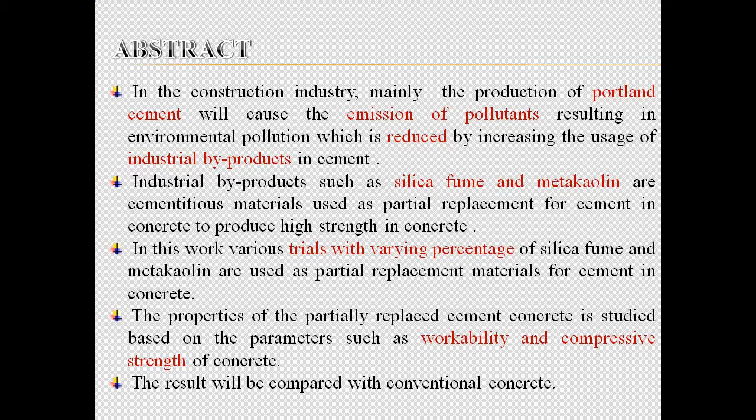So in the construction industry, mainly the production of Portland cement will cause emission of pollutants, resulting in environmental pollution, which is reduced by increasing the usage of industrial byproducts. The industrial byproducts are such as silica fume and metakaolin. Here we carried out various trials using varying percentages of silica fume and metakaolin. We are calculating their strength by seeing their parameters such as workability and compressive strength. The obtained results will be compared with conventional concrete.

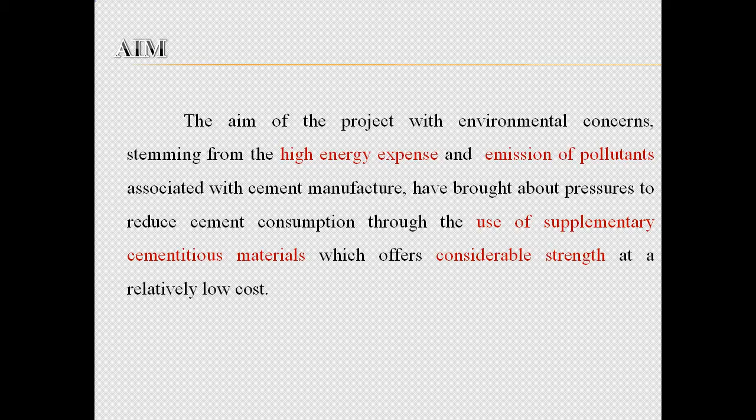The aim of the project: environmental concerns stemming from high energy expense and emission of pollutants associated with cement manufacture have brought about pressures to reduce cement consumption through use of supplementary cementitious material, which offers considerable strength. The objective of the project is to produce high strength concrete using cementitious materials, which are silica fume and metakaolin. By adding these materials, we can get an improvement in workability, durability, and resistance to cracks. It also reduces the emission of pollutants and can increase the lifespan of concrete.

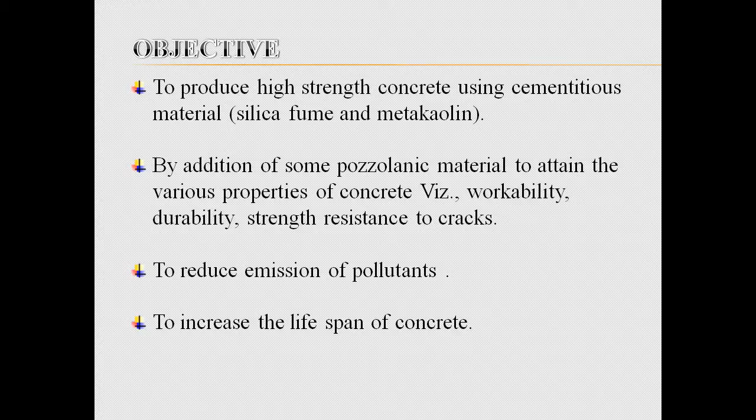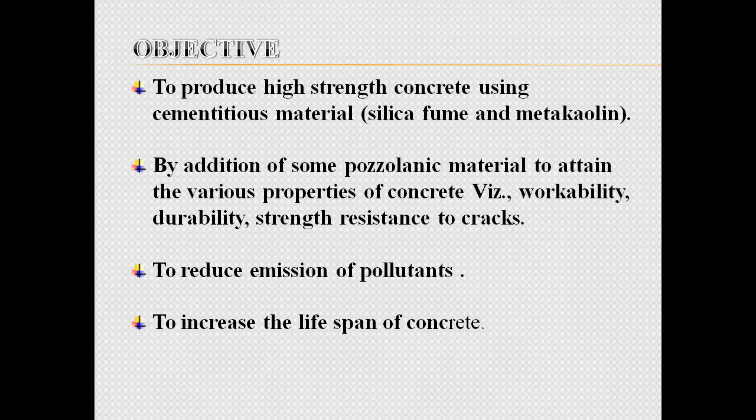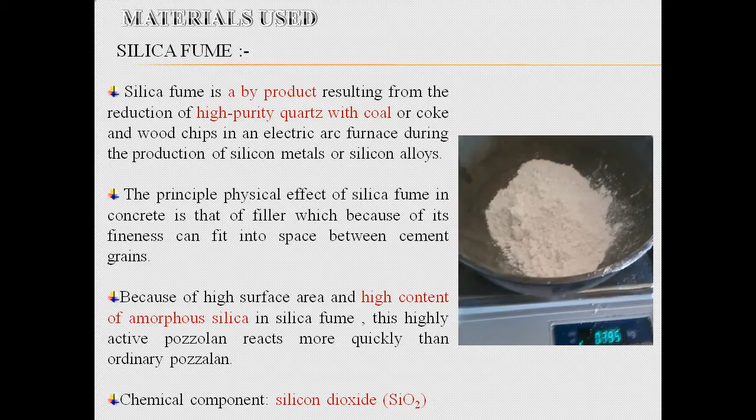The material we are using is silica fume. As you can see, silica fume is a byproduct resulting from the reduction of high purity quartz with coke or coal. The principal effect of silica fume is that its very fine particles can fit into spaces which cannot be filled by cement materials. So it has a high content of amorphous silica.

The next material would be metakaolin. Metakaolin is a pozzolanic material which is manufactured from selected kaolins, which is highly efficient by acting as a cementitious material. So by adding cement and water, you get a cementitious and a non-cementitious material. Then adding the non-cementitious material with metakaolin produces cementitious material. And you can see the percentages of silicon dioxide and aluminum trioxide shown below.

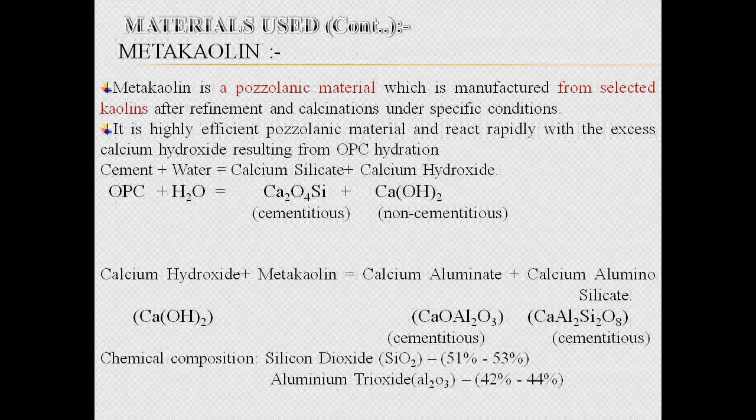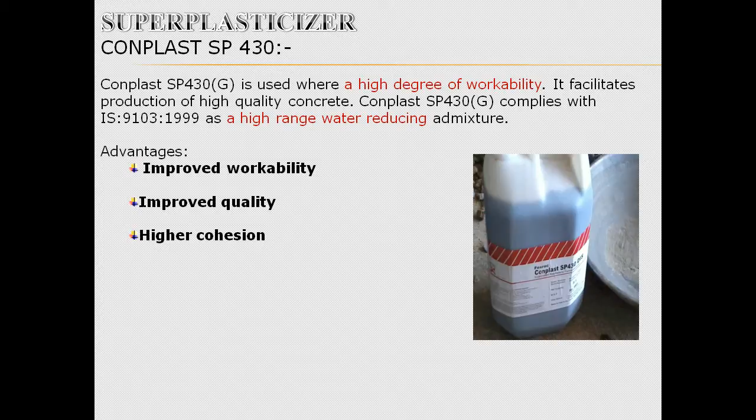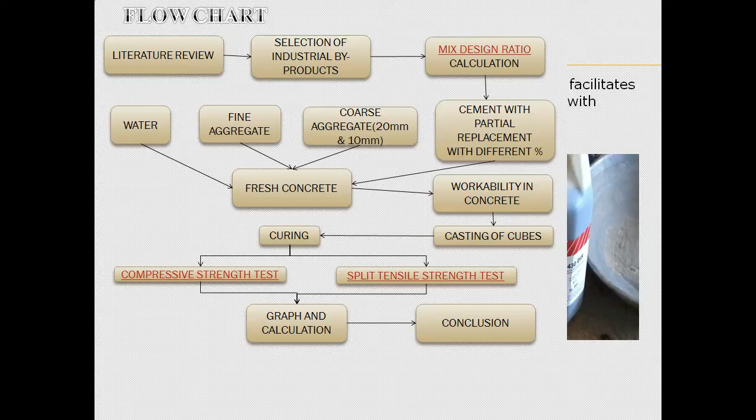Next is the methodology flowchart, where first we have collected the literature reviews and we have selected the materials. Then we have done the mix design ratio accordingly. Then by adding silica fume and metakaolin with varying percentages, we are preparing concrete. The workability of the concrete is found using tests, and then we are casting the cubes, then curing them for 7 days, 14 days and 28 days, then testing them for compressive strength and split tensile strength. Then the graph and calculations. The experimentation done would be for workability, slump test, and for strength, compressive strength test and split tensile strength test.

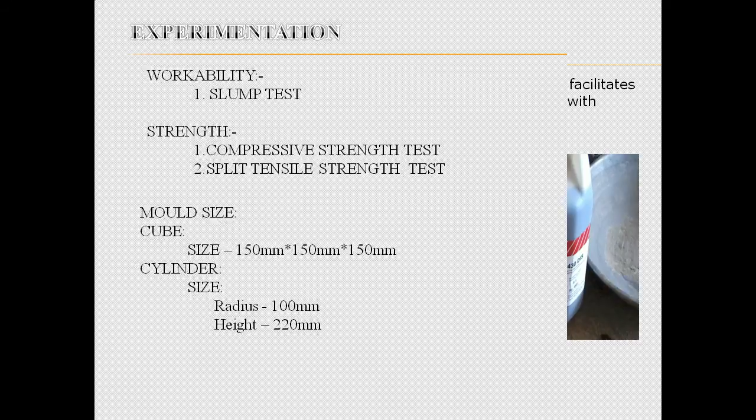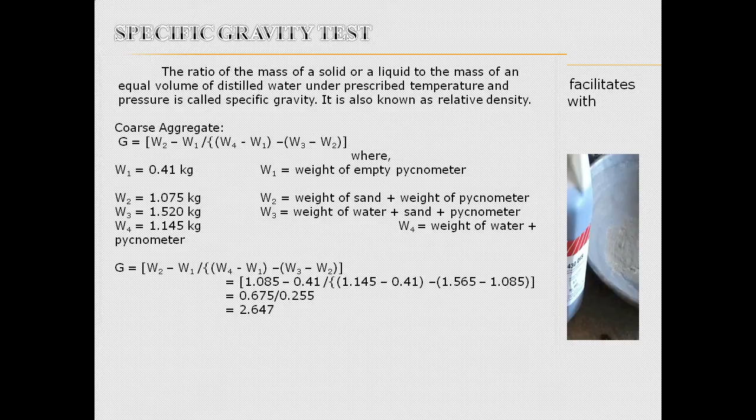Next we have the specific gravity test, which is done by pycnometer. As you can see, W1, W2, W3 and W4 respectively represent the empty pycnometer, weight of sand plus weight of pycnometer, weight of water plus weight of sand plus weight of pycnometer, and the last represents the weight of water plus the empty pycnometer. So by calculating this, for coarse aggregate we have found the value of 2.647. Similarly, for fine aggregate we have found 2.62. These are the specific gravity values.

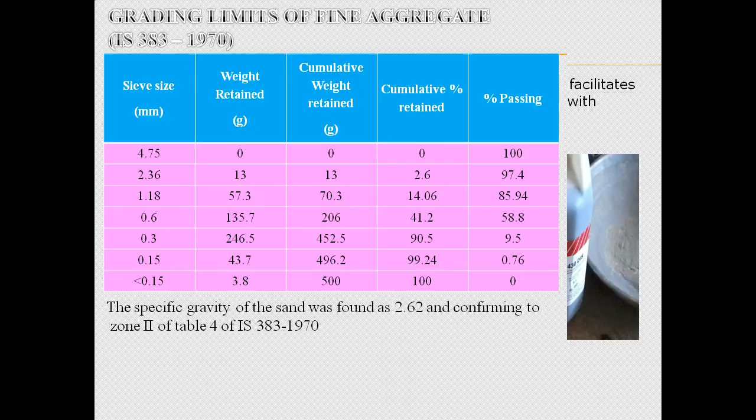Next, we are grading the limits of fine aggregate according to IS 383 of 1970, and it was found to be conforming to zone II. Next, we are doing the slump test using the slump cone, and we found all the slump values to be less than 50 mm.

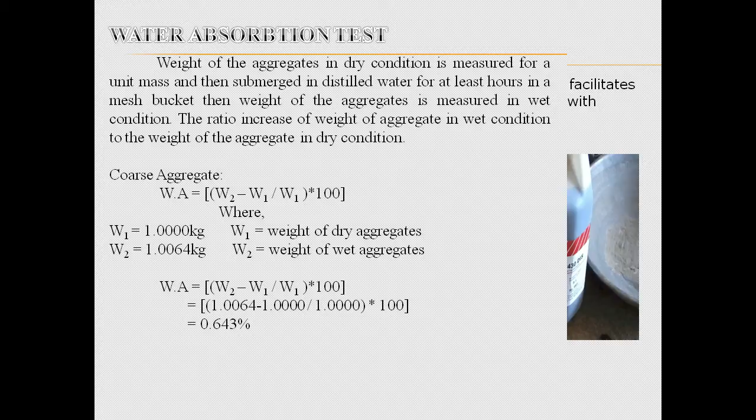Next is the water absorption test, which is done by wetting the coarse aggregate, then drying it, then finding the amount of water absorption in the coarse aggregate and fine aggregate. In coarse aggregate, the water absorption was found to be 0.643%, and similarly, for the fine aggregate, it was found to be 1%. So next is the mix design which we have followed.

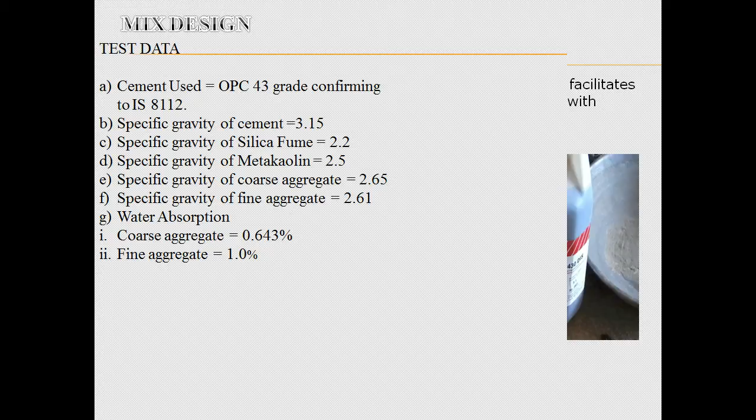We have used OPC 43 grade cement, and the specific gravity of cement was 3.15, specific gravity of silica fume was 2.2, and the specific gravity of metakaolin was 2.5. The specific gravity of coarse aggregate is 2.65, specific gravity of fine aggregate is 2.61, and the water absorption is given as 0.643%.

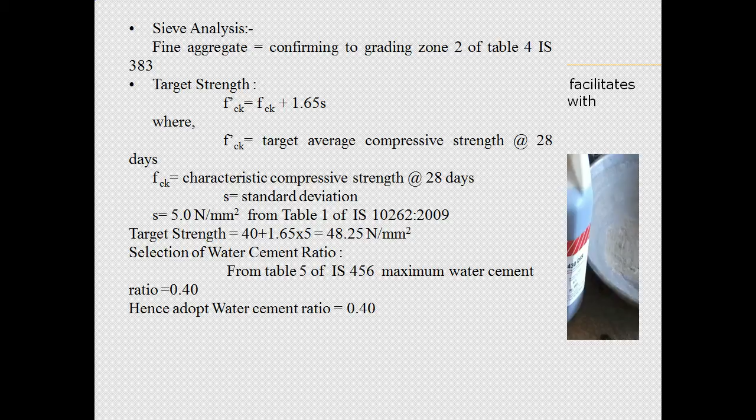Then doing the sieve analysis test conforming to zone 2, we got the target strength, and the 1.65 S represents the standard deviation, where S can be 5 according to table 1 of IS 10262. So the maximum value for M40 concrete we have done here should be around 48.25. That is the maximum value which we get from IS. So we are adopting a water cement ratio of 0.4.

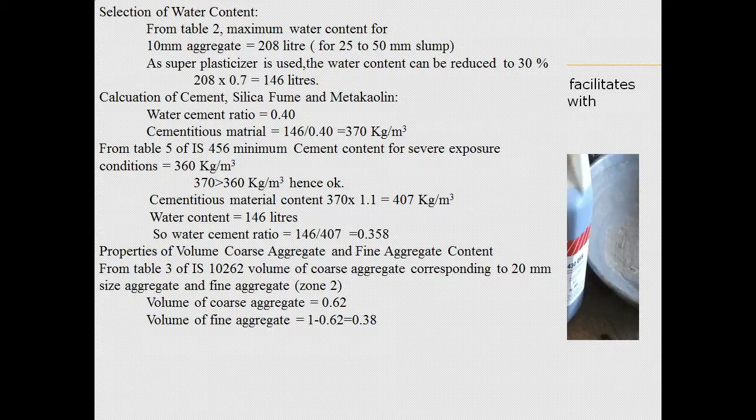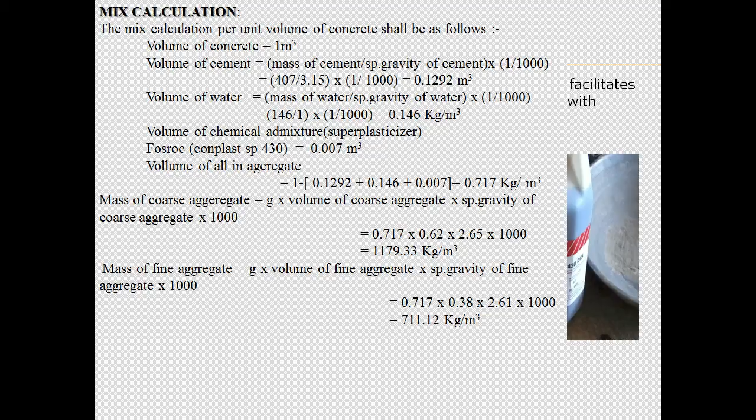Then selection of water content, then adding the superplasticizers, then the coarse aggregate and fine aggregate is found. Then the mix is done accordingly. For 1 meter cube of concrete, the volume of cement is taken as 0.1292 meter cube, volume of water is taken as 0.146, and the chemical admixture is taken as 0.007 meter cube. From all these, we have got the mix proportion as 1 : 1.747 : 2.91 : 0.358.

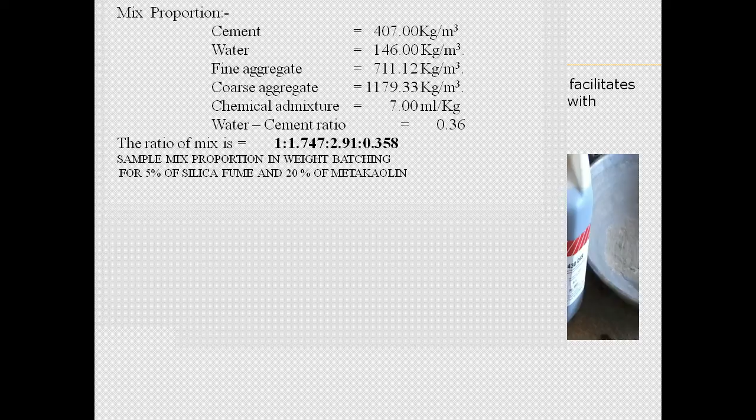Then the table represents the weight batching for 5% of silica fume and 20% of metakaolin. Then we have got the compressive strength, and as you can see, for 0% silica fume and 0% of metakaolin, we have got the 7 days, 14 days and 28 days strength, which was found to be 44.62. Then gradually there has been an increase by increasing the silica fume and metakaolin percentage. As you can see, the 25% replacement, that is silica fume of 5% and metakaolin of 20%, gives the greatest strength in 28 days, which is found to be 50.27 Newton per mm square.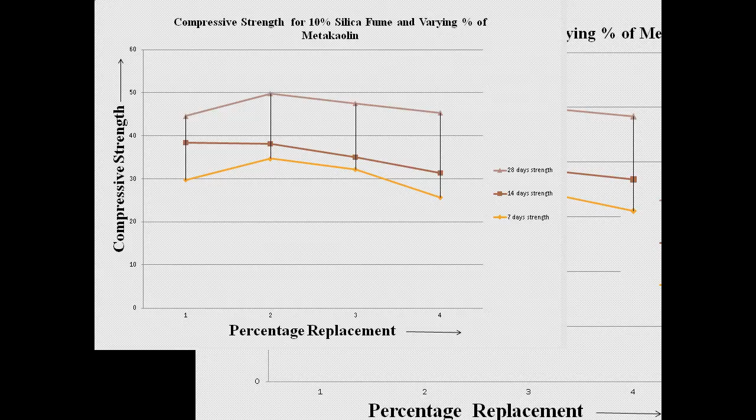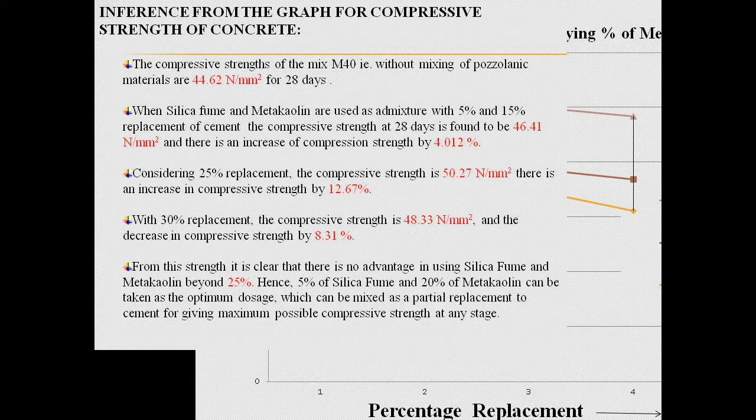So as you can see here, for normal concrete, the compressive strength is around 44.62 for 28 days, and when the silica fume and metakaolin is added, the strength is increased by 4.012%, and when it's increased to 25%, you can see an increase by 12.67%. With 30% replacement, you can see a decrease. And so we are considering that for silica fume and metakaolin, 25% replacement is the maximum replacement where you can get maximum strength.

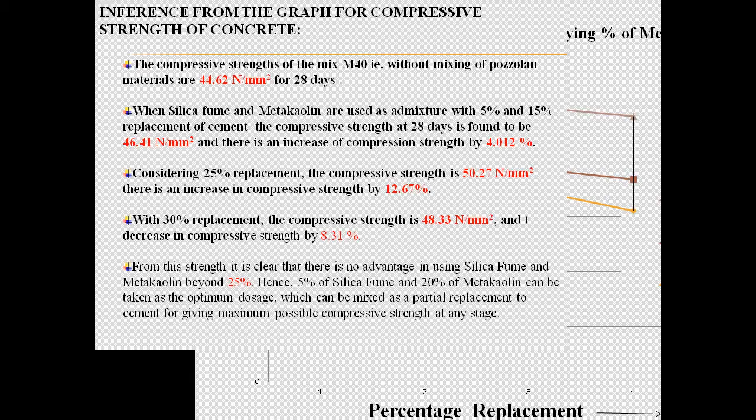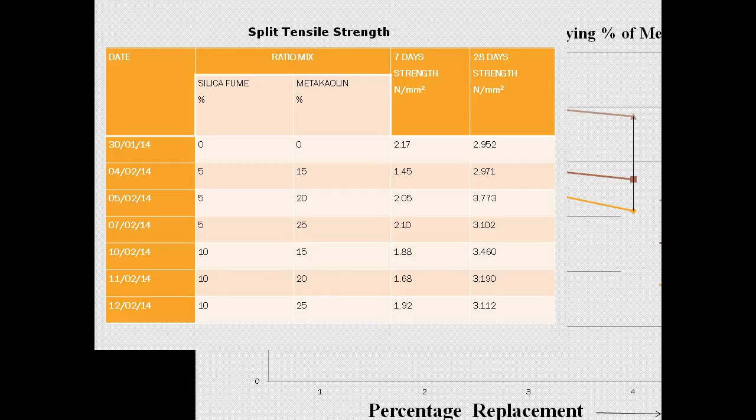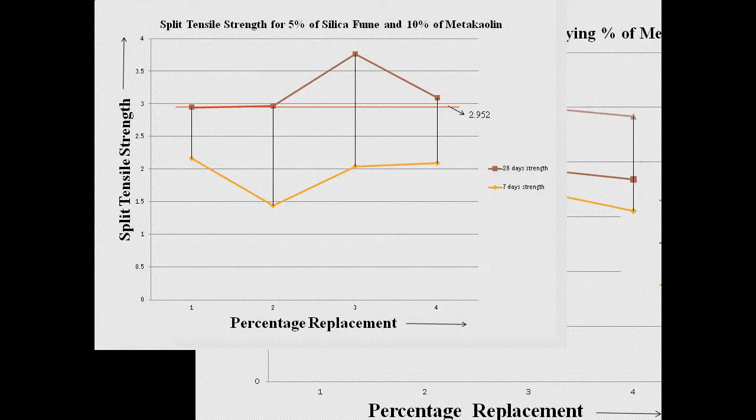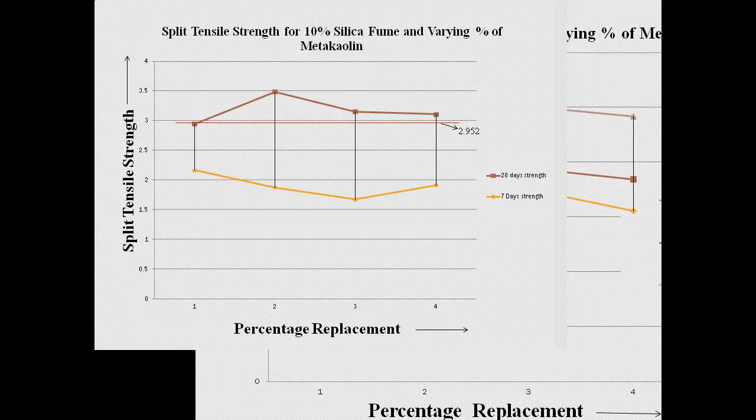So this is the split tensile strength we have done in the lab. Similar to the compressive strength, you can see in the table the greatest value is for 25% replacement here also. From the graph, you can see the red line 2.952 represents the reference line, and for 25% replacement you have got the maximum strength of 3.77 Newton per mm square, and similarly for 10% of silica fume and varying percentage of metakaolin, there also 25% gives the maximum value.

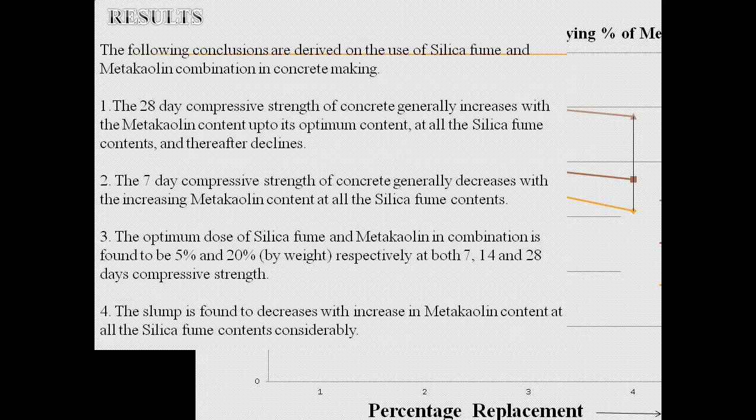From these we have obtained the results, that is the 28-day compressive strength of concrete generally increases with the metakaolin content up to its optimum content at all the silica fume contents, and thereafter it declines. The 7-day compressive strength of concrete generally decreases with increase in metakaolin content at all the silica fume contents. Thus, the optimum dosage should be 5% and 20%, that is the maximum strength. The slump is found to decrease with increase in metakaolin at all the silica fume contents.

Then we have given the conclusion. The maximum strength is around 25% replacement. The maximum replacement for silica fume is 10%, but in our project 5% is the maximum replacement. The maximum replacement for metakaolin according to studies is 30%, but we are considering the maximum strength to be at 20% only. From the results, the strength is found to be more than the conventional concrete. Thus, we are reducing the pollutants and also increasing strength.